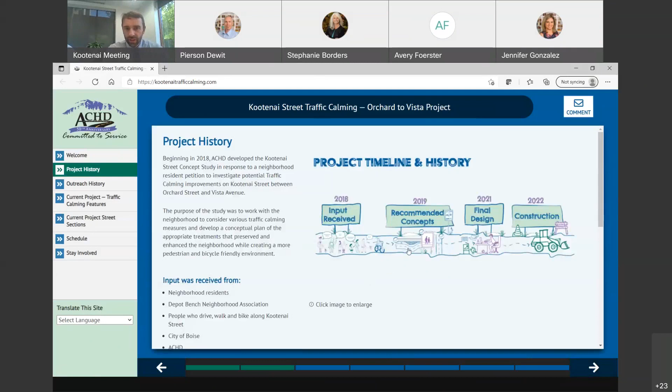So with that, I'm going to take you through some project history. Pierson, if you wouldn't mind changing the slide. So starting in 2018, the project originated through a neighborhood petition that was submitted to ACHD for us to investigate traffic calming measures along Kootenai Street between Orchard and Vista. In 2018 and 2019, ACHD, with the help of the neighborhood, developed the recommended concept. In 2021, we began the design process based on the recommended concept for the project. And construction is anticipated to begin in 2022.

I'm going to take you briefly through our public outreach. Pierson, if you don't mind changing slides. So in 2018, ACHD conducted 3 public involvement meetings. On March 1st of 2018, that was our first public involvement meeting, and we asked if traffic calming was necessary along Kootenai Street, and what we heard was yes, it was. We hosted another public involvement meeting in July of 2018, and what we learned in that meeting is the trees along Kootenai were an important characteristic of the neighborhood, and the public would not support removing or taking down those trees for the project.

Following that meeting, we held our 3rd meeting where we presented the recommended concept study for Kootenai. And in that meeting, we learned that the public was in support of the recommended concept. Now that I've taken you through the project history, I'm going to turn this over to our design consultant, Pierson Dewit of HDR. He's going to take you through some of the design details.

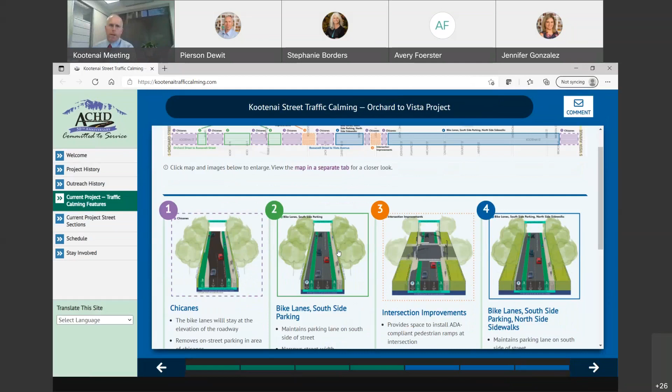Thank you, Dave. Good evening, everybody. What we're going to talk through here is some of the main traffic calming features and improvements that have taken place or that are proposed to take place along the corridor. As Dave previously mentioned, the project improvements extend from Orchard Street to Vista Avenue. And this graphic that you see here talks about some of the components associated with the project. So these areas where we talk about chicanes, those are going to be proposed to be placed along these areas in the purple. Just so you have an understanding of a chicane, it's a traffic calming device that reduces vehicle travel speed.

One of the things to note is during the concept phase, we had identified that the bike lanes go through the chicanes and they were going to go along the elevation of the chicane. Those are now going to stay at the elevation of the roadway. So that's a minor change that's taken place between the concept and where we're at in the design phase. It's going to help out with drainage. There's pretty substantial cost savings associated with that.

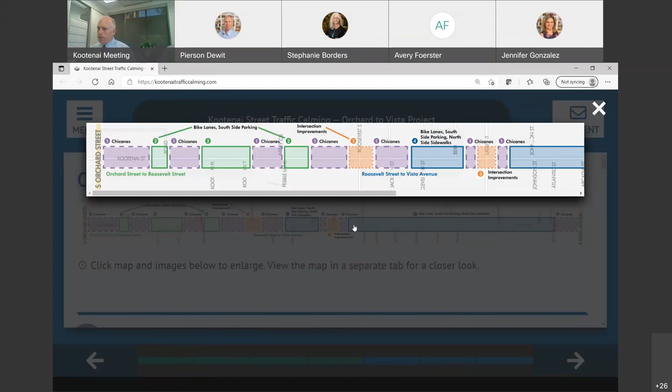And that's representative with this graphic here. Again, it gives you some additional information with respect to the chicanes. These are proposed to be located at Orchard and Kootenai, Roosevelt and Kootenai, Kootenai Place and Kootenai, Latah and Vista. And we'll have a graphic that we're going to look at after we get past this slide that'll give some more specific detail to where those are going to be placed.

For item number 2, I should say, we're identifying the fact that there's going to be bike lanes along both sides of the roadway along this component of it. It does maintain the on-street parking on the south side of the street. On the north side, that will be replaced with a bike lane.

And then one of the things I also wanted to share with you today is at the intersection of Roosevelt and Latah, the previous concept hadn't identified the need for any sort of signal intersection improvements. We are going to move forward with incorporating signalized upgrades at those intersections. A lot of that is due to the fact that the signals have been in operation for many years and their useful life has been extended beyond what it would normally be.

And it's also going to help out with providing directional access for walking paths along Kootenai and Roosevelt and Latah and Kootenai, excuse me.

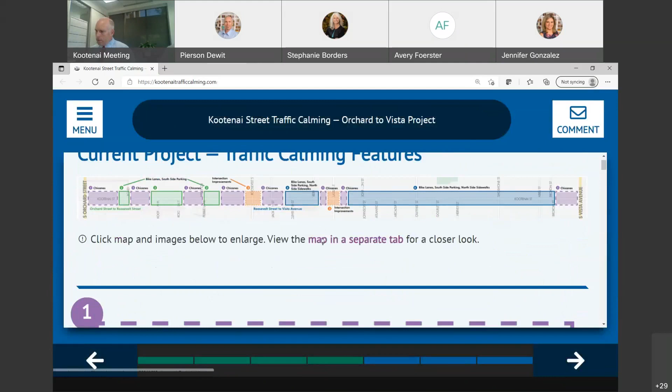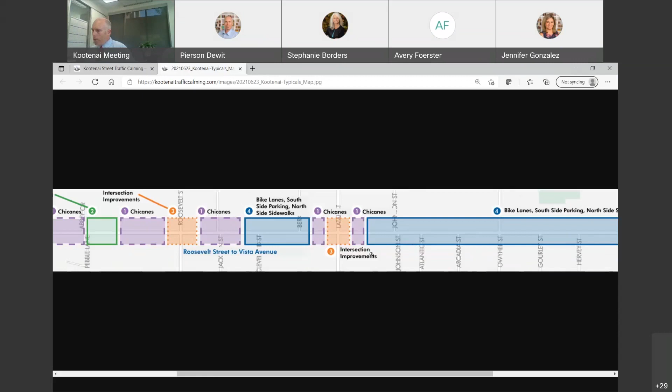So as we move down the corridor, as we get past Latah, there are no sidewalks currently that exist along Latah or along Kootenai east of Latah. So what we're doing with this proposed project is we're going to add sidewalk along the north side of the road in the place where the on-street parking is currently. So where the existing curb is now is where you're going to see the new sidewalk get placed. And then there'll be a bike lane along that side, 2 10-foot travel lanes, a bike lane along the south side, and that will continue all the way to Vista.

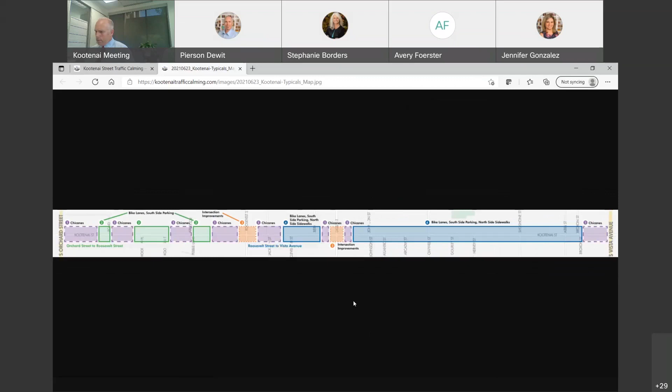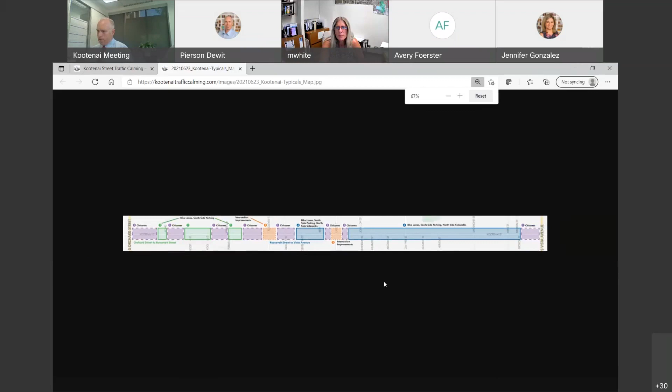So I'm going to get out of this graphic for now, if I can. Can't get out of this graphic. There we go.

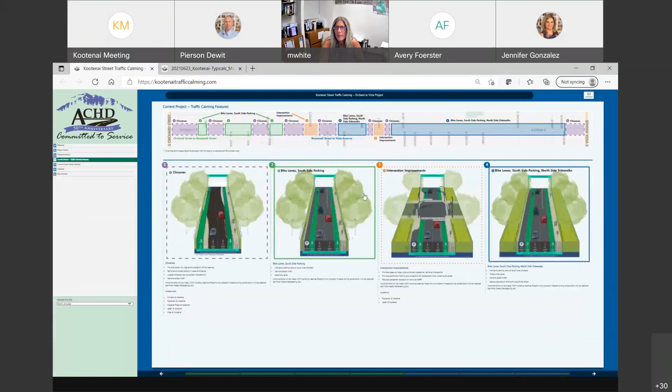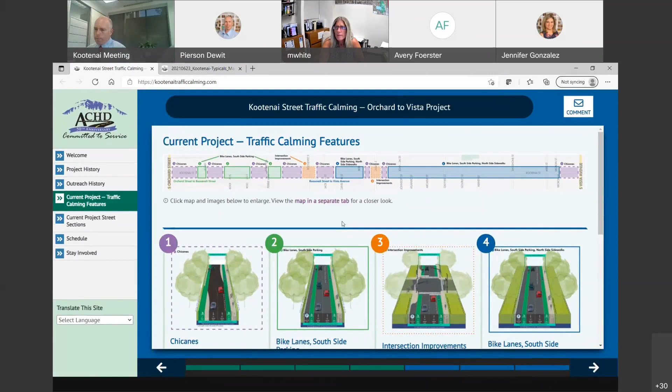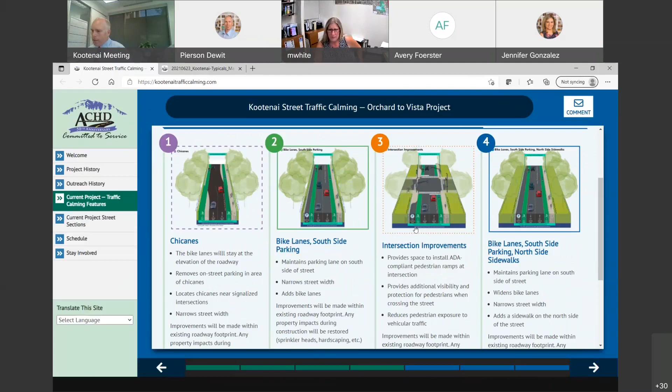Okay, so that is the basic rundown of the changes that have taken place since the concept and gives you a basic overview of what is being proposed along the corridor from Orchard to Vista. These next couple slides are going to really show some more specific detail. We're going to kind of walk through 6 distinct segments that we've identified along the corridor. It's going to provide a little bit more detail as to what it is we're proposing to do along the corridor.

You'll notice this first segment we're going to talk about is from Orchard to Kootenai Place. And when this is available tomorrow, you can click on each one of these tabs to get a closer image of these, similar to what I've been doing as I've been navigating. So we'll walk through this. As you'll notice, the green highlighted sections indicate where the bike lanes are proposed to be placed.

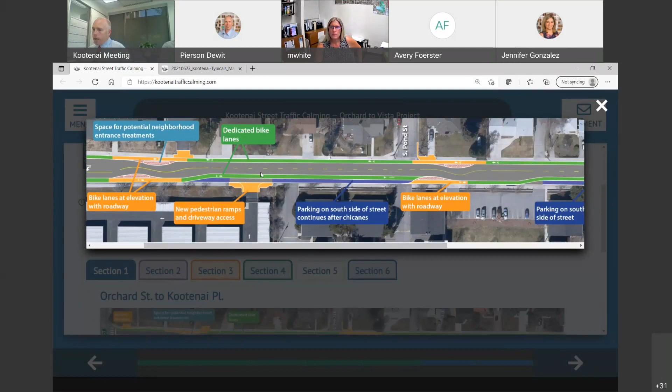This orange area shows where the chicanes are going to be placed. Chicanes are identified pretty much directly east of the Orchard and Kootenai intersection. The blue represents the fact that there will be parking retained along the south side between the bike lane and the edge of the road. As we move past Pond Street, there's going to be another set of chicanes placed along this portion of Kootenai. And then as we work to the end of segment number 1, Kootenai Place, you'll notice that it's 2 vehicle travel lanes, bike lanes north and south, and then parking on the south side of the street.

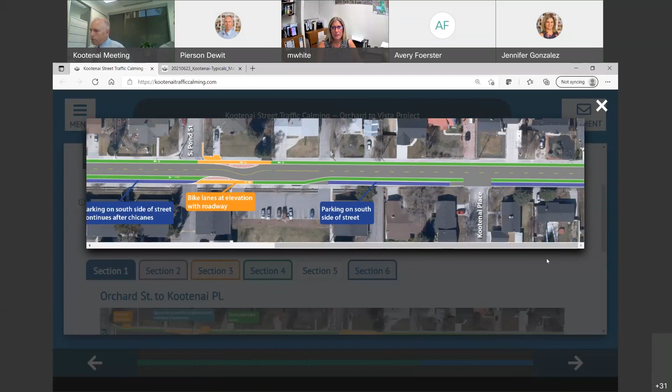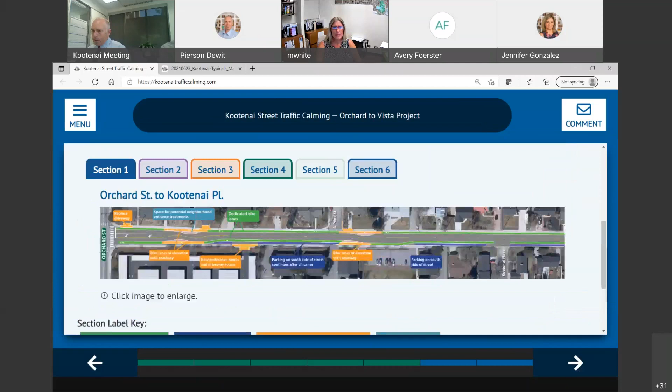Moving on to section 2, this will be from Kootenai Place to Roosevelt. And it'll be similar to what we just saw on the last segment. Once we get past Kootenai Place, bike lanes both sides, 2 vehicle travel lanes, and then parking on the south side. As we get near Abbey Circle, there's going to be 2 chicanes placed, again, to help reduce through traffic speed.

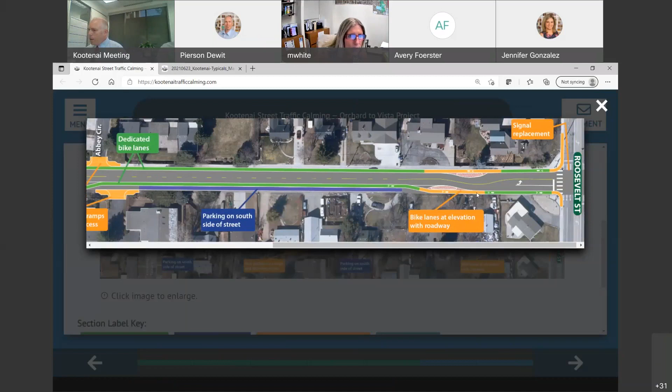Moving past Abbey Circle and almost all the way to Roosevelt, you'll notice, again, bike lanes north and south, vehicle lanes on either side, and then on-street parking on the south side of the street. Just before we get to the Roosevelt-Kootenai intersection, there is a set of chicanes, again, as you get into the intersection. So moving on to the next segment, Roosevelt to Latah.

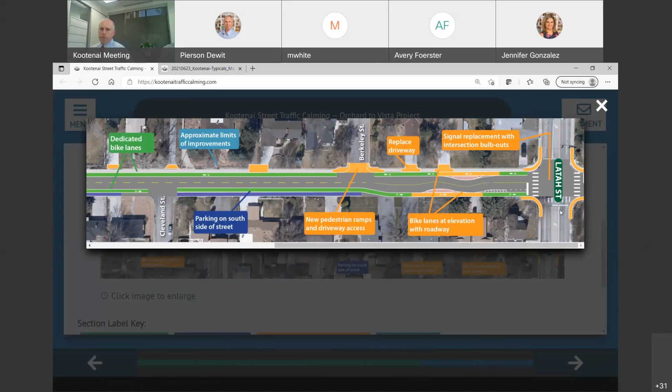Again, similar to what we were talking about, we've got 2 vehicle travel lanes, 2 bike lanes, and on-street parking along the south side. That continues along Kootenai pretty much until we get just past Berkeley Street, where the bike lanes will shift a little bit farther to the south. We will develop another set of chicanes just in advance of the Latah intersection. And again, just to reinforce what we spoke about earlier, we will be doing signalized intersection improvements at Latah.

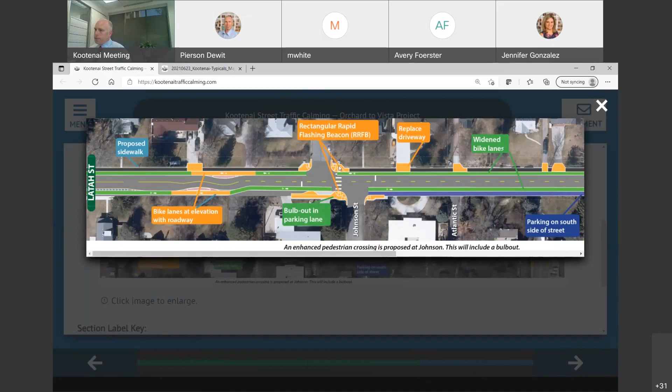Section 4 is from Latah to Owyhee. Once we move past Latah, again, big surprise, another set of chicanes directly east of the intersection, again, to try to reduce travel speeds. Bike lanes throughout the corridor are maintained. As a part of the concept, it was determined that we were going to be adding an RRFB at Johnson. That's to help promote pedestrian access north and south of this intersection, and there's a school that kids are trying to get to, so that's another improvement feature.

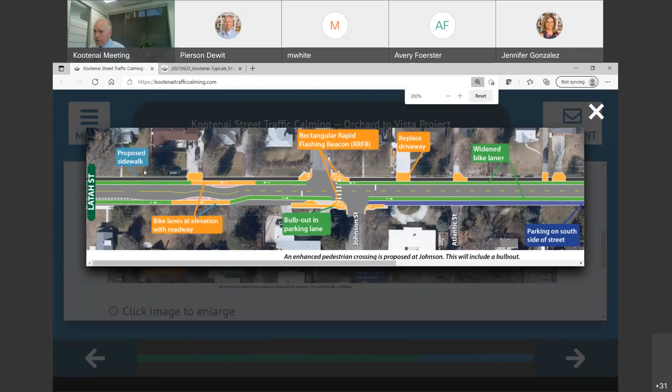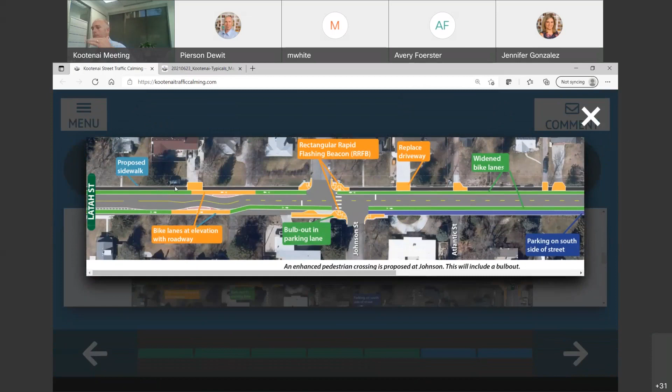And then you'll notice, I'll zoom in on this a little bit, that we're showing the proposed sidewalk past Latah. Again, the thing to keep in mind is that this is going to be placed where the curb exists right now today. So if you went out and looked along the corridor, you would notice where the curb is right now. That's where the back of the sidewalk will be in the future condition.

As we work farther east down the corridor, we get past the enhanced pedestrian crossing at Johnson Street. We're continuing with a section that is placing new sidewalk along the north side of the road, bike lane, 2 travel lanes for vehicles, another bike lane, and then on-street parking. And that continues all the way through to Owyhee Street. At Owyhee Street, we are proposing some bulb outs. That's to limit the crossing distance for pedestrians and other users of the sidewalk network across Owyhee and Kootenai. And that is section 4.

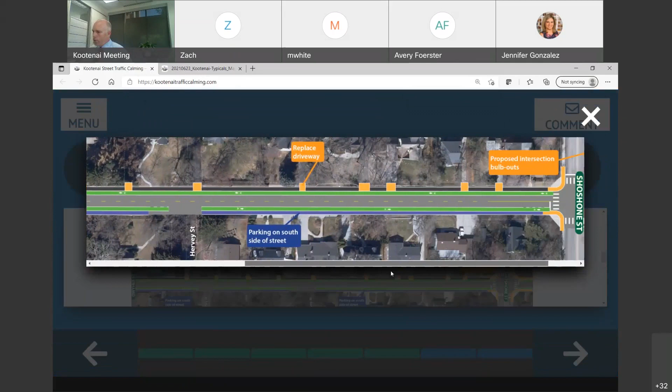Moving on to section 5, from Owyhee to Shoshone, you'll notice a similar theme emerging once we get past Owyhee. The proposed sidewalk, the widened bike lanes, the vehicle travel lanes, and the on-street parking. It's pretty consistent from Owyhee past Gurley and Hervey all the way to Shoshone. Shoshone is another intersection that's being fully improved. We're going to add bulb outs along certain sides. There are bike lanes currently along Shoshone, so the bulb outs won't be impacting any of the bicycle movements along the north-south corridor. And the bulb outs along Kootenai will also not deter the traveled pathway of the bicycles along that stretch.

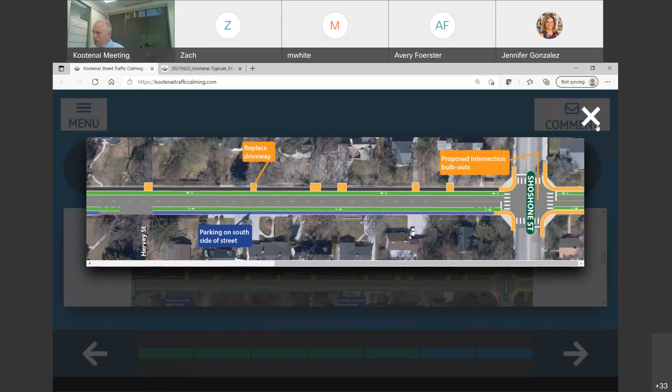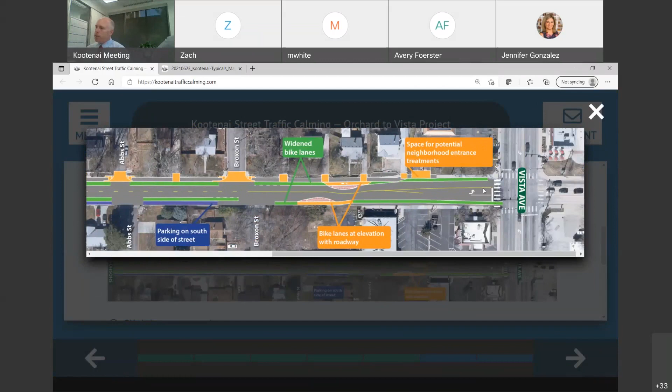Moving on to the last segment, this will be Shoshone to Vista. Again, we're proposing sidewalks along the north side, 2 vehicle lanes, bike lanes, and on-street parking along the south side. This continues all the way basically to Vista Avenue. There aren't any proposed improvements with Vista Avenue as a part of this project. The project will stop short of that. There are future improvement projects in the works for Vista Avenue, so those will be coordinated down the line. There is one more set of chicanes right before we get to Vista Avenue, and we're also showing the driveway repairs associated with this portion of the corridor.

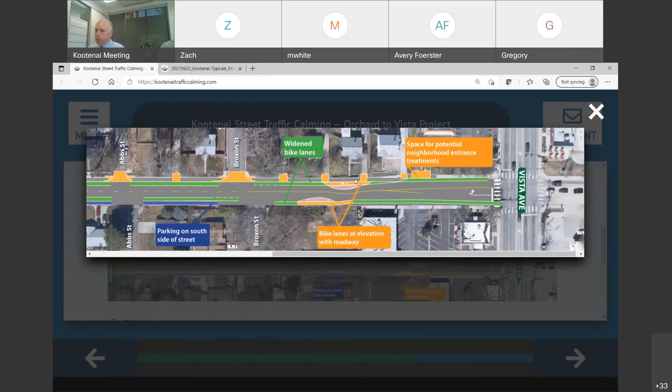So that is a basic rundown of the current project street sections as we work our way all the way from Orchard to Vista Avenue. It's about 7,500 feet of roadway connection with this project. I'm going to hand this back over to Dave Rader. He's going to talk a little bit about schedule as we move forward.

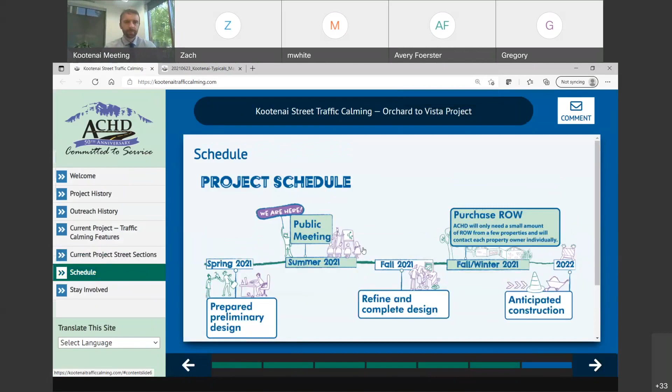Thank you, Pearson. So currently, just a brief overview of our project schedule. Right now, the project's in design, and we expect to finalize design in the fall of 2021. And before we did that, we wanted to get feedback and comments from the public, and that's where we are today.

Following the completion of design, we will have a small right-of-way phase of the project. We do need to acquire some right-of-way through this project, but it's from a few properties and a small amount. ACHD will contact each property owner individually, so just want to make you aware of that. You can expect to hear from us if that is needed. We are anticipating construction in 2022. We expect construction to begin early in the spring of 2022 and finalize in the fall of 2022.

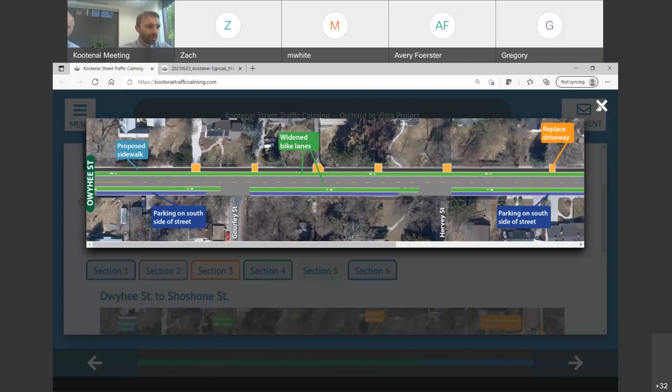Yeah, so there was a question earlier about the project costs, and I think one thing to point out in terms of how much the project costs is during the concept phase, it is a concept and a concept level estimate, and as more details are refined through the development of the design, the project estimate also becomes refined. So this is really something we're keeping aware of. We're keeping track of and monitoring at ACHD to make sure we have the appropriate budget for this project. So thank you for that question.

And to follow up with what Dave's saying there, one of the things to keep in mind is with the change in the chicane staying at the grade of the road, there's a pretty substantial cost savings associated with the drainage improvements that will not need to occur now as a result of that. So we're always looking at ways to try to minimize the cost and maximize the value. And that's one example of where that cost savings will be realized.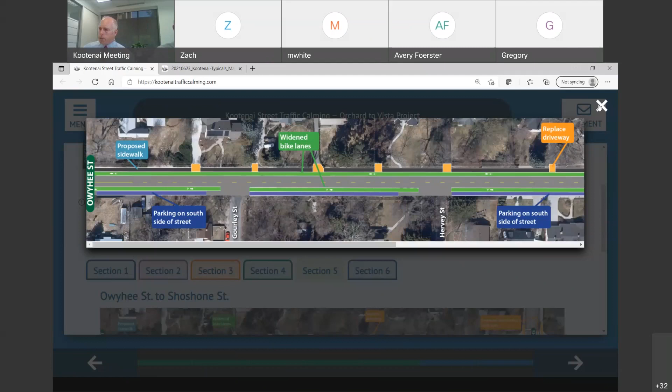There's a question about tree removal, how many trees? At this point in the design, we've identified some trees that may need to be trimmed. One thing to keep in mind with respect to that question is a lot of the improvements are happening within the existing footprint of the road. Along the west end of the corridor near Pond Street, there are some areas, I believe, where we identified some tree trimming, but there is not a substantial impact to any of the trees along there.

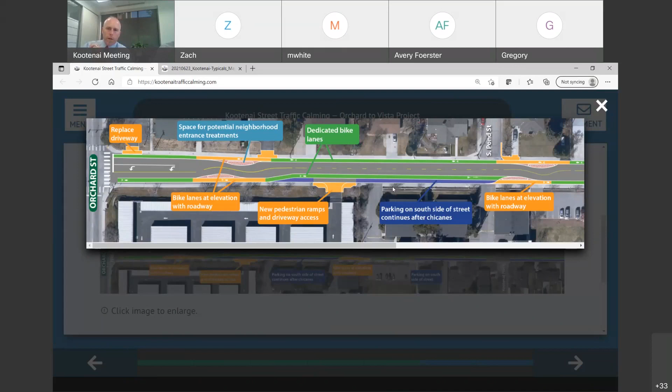There is probably going to be some tree trimming that's going to occur at the intersection of Latah and Kootenai. For any of you that have navigated through this corridor before, you know there's some pretty large ivy where the signal is located along that southwest corner. So we'll have to do some landscaping improvements there.

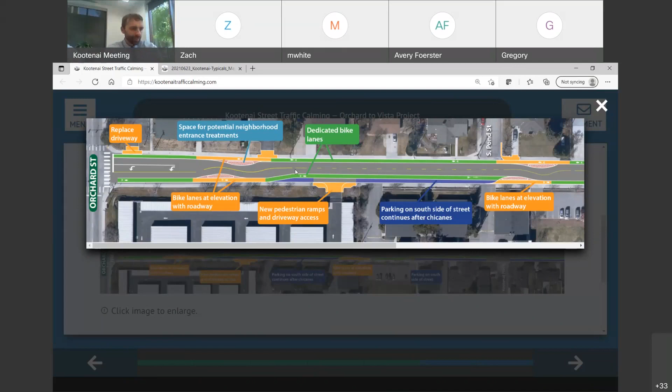So there's a question from Brian. What will be the cost for sidewalks on both sides of Kootenai Street? So we could develop an estimate for that, but again, we were balancing what we heard through the development of the concept and what would calm traffic in Kootenai. So primarily, we wanted to fit traffic calming improvements in the existing roadway footprint.

So we landed on sidewalk on one side of the street, and again, that is the north side of the street. That way we can retain some of the neighborhood characteristic through all the mature landscaping and large trees out there on Kootenai. So it was a bit of a balancing act, but I could follow up with you if you're interested on the cost for sidewalk on both sides.

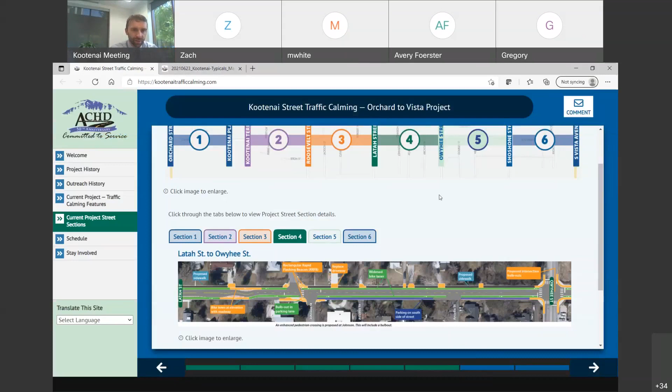We're just navigating through some of the comments, making sure we're addressing them in the order that we're receiving them. So we got one: can we get a crosswalk at Abs and Kootenai? There's a question here from Chris about getting a crosswalk at Abs and Kootenai. So for this project, we don't have a crossing planned there. We are looking at adding some receiving ped ramps on the north side of Kootenai at this location.

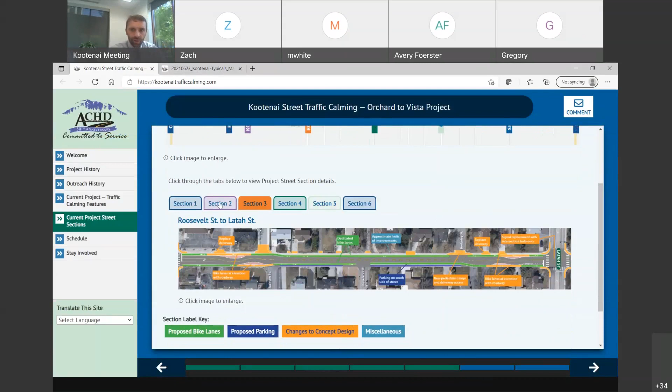Adding a crosswalk is something ACHD would have to evaluate in the future. It's something we can take a look at, but not something that's currently incorporated with this project.

Okay. We got a question about whether the four-way blinking stoplights stay at Owyhee and Shoshone. Is there a question about removing that or not? So the current plan is to not change anything with that. Yeah, so there's a question about the blinking light at Owyhee and Kootenai. We don't have anything identified in the plans currently to remove that. So as far as we understand with the project at this point, the answer will be no. We're going to retain that as it is.

We'll talk about that. There was a comment about a chicane blocking access to a driveway. One thing we are not going to do is prevent access with a chicane. I don't think we have identified any chicanes that are blocking access at this point, but it's something we can double check and make sure. But I can say that no chicanes will block driveways.

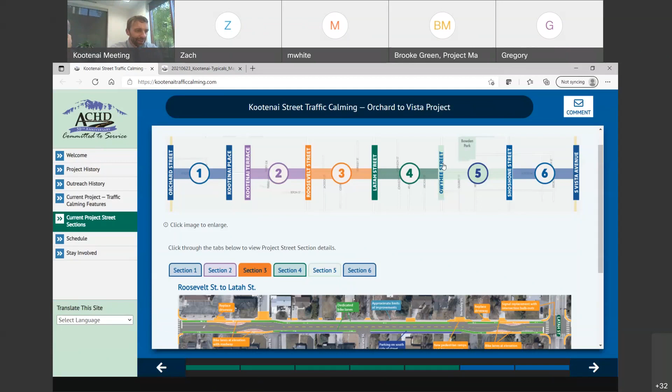So there's a question from Zach: just to clarify, sorry if you have already addressed this, but how is this different than the already approved plan in 2018? Well, it's really not much different, which is, I think, great news. I guess the most significant changes from the concept are the new signals being installed at Latah and Roosevelt. Those are the most significant changes from the concept, but really, it's pretty much the same.

Again, we appreciate the feedback we're getting about the people that are in favor of the project. We do appreciate the questions.

I think we just talked about the comment from Kristen. Traffic control shows cost of 2.5%. What are the considered material costs in your line items? I don't know if that's based on the concept, but once we advance this to final design, which is what we're working on right now, we'll have a line-by-line breakdown for the costs associated with any potential flagging, temporary traffic control to maintain pedestrian access, vehicular access, and anything else associated with traffic control.

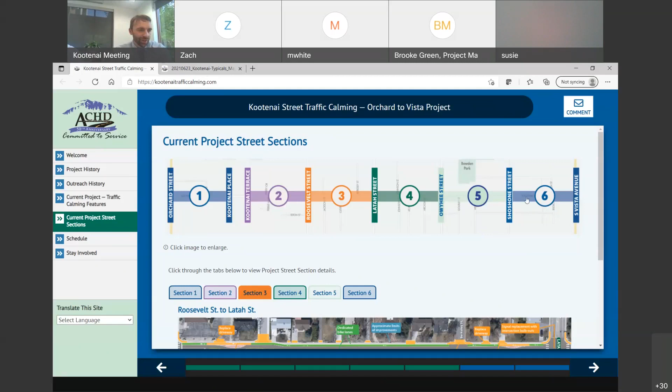So yeah, I do too want to thank everyone for your questions and comments. I think we have got most of those answered. If we haven't addressed your comment or question, please leave it in the chat. I do really appreciate everyone's time and engagement in this project. It's really a great project to be involved with, so thank you.

Oh, there's a question about, can something green be planted in the bulb outs? So the answer to that is yes. And I reached out to the Depot Bench neighborhood to see if they may be interested in improving those, sorry, not bulb outs, chicanes. So if the neighborhood is interested in landscaping the chicanes, that is something we can take a look at. So I just ask anyone that's involved with the Depot Bench Neighborhood Association to reach out to me, and that's something we can try to incorporate.

So we threw the contact information back up there for Dave Rader, the ACHD project manager. As we move this towards the final design phase, obviously we're going to be reaching out to a few of you where we're having some right-of-way. But again, this will be out on the website, open to comments for the next couple weeks, and that closes July 22nd.